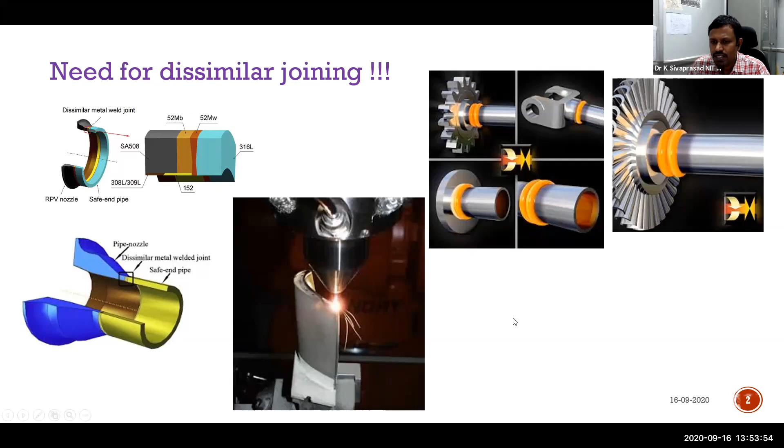So it's not just doing joining alone. The joint efficiency, joint strength, joint metallurgical properties, grain structure, phase structures - all these things one has to be very, very cautious about. So one such attempt is made by my student, Mr. Soklingam. He himself made this workflow.

So I suggested them, you have to take 2 welding processes and at least 1 or 2 additive manufacturing. We could not find 2 varieties of additive manufacturing, but we got a chance to work with selective laser melting, which is a powder bed fusion technique. Then we have readily available with us GTA welding in our lab, and we have good contacts with eminent people working in laser beam welding and electron beam welding in different sectors. So we took their help to get it done.

So he has taken aluminum 0.5 cobalt chromium iron nickel high entropy alloy, then aluminum 0.1 cobalt chromium iron nickel HEA. The difference is in the aluminum content only - here aluminum is half of the fraction, here it is only 10% of the total fraction. First of all, HEA is nothing but high configuration entropy alloy.

To explain in a layman condition, we will say aluminum copper alloy, say aluminum 96%, 4% copper. Then you will say aluminum based.

So this is some other forging operations.

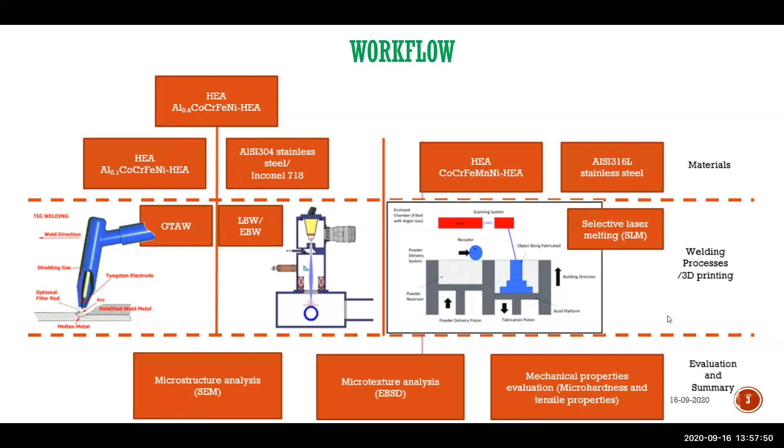So aluminum 0.1 is a single phase FCC, similar to austenitic stainless steel or Inconel 718 equivalent. Aluminum 0.5 has some amount of BCC and some FCC fraction.

Initially we studied a similar system. We felt weldability is there, but it is somewhat difficult, especially for dissimilar welding systems. Then we moved to aluminum 0.1, which is single phase FCC, relatively highly ductile, with much higher work hardening ability than 304 and Inconel 718. We chose this combination because all are FCC, FCC, FCC.

It is supposed to be weldable according to mechanical engineering concepts, but according to metallurgical concepts, there is a huge alloying system. When welding, they melt down and diffuse inside, and there is a high probability that they will form undesirable and brittle phases. So there is a huge problem associated with joining 304 and Inconel 718.

Even though the system is now somewhat stabilized with respect to weldability, there is still some Laves phase and other metallurgical undesirable phase formation, thereby reducing properties. So we chose these three systems for that reason, using popular GTAW, that is TIG welding, and laser and electron beam welding combinations.

The same system we could not do in SLM in Europe because they are restricting aluminum in their system. So without aluminum, we substituted with manganese and started working on this one.

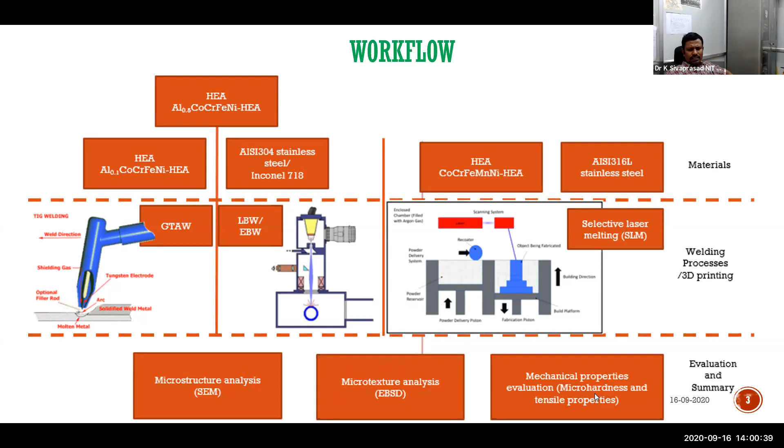He has done extensive microstructural evaluation, followed by microtexture analysis, because I am basically a metallurgist, so I always want to know what is inside the microstructure, what is inside the grain, what are the precipitates. This kind of interest is there for me, so we went for detailed characterization associated with that. Then regular micro hardness profile, tensile properties, and other correlation techniques for required questions.

Then we took that dissimilar welding. We did EBW with respect to 0.1 with 304 stainless steel and 0.1 with Inconel 718 using electron beam welding, which is designated as E.

0.1 stands for AC1, 0.5 stands for AP5, like that it is designated AC2. Then TW stands for TIG welding, LW stands for laser welding.

Then AC2 is the TIG welding combination. T stands for TIG here, with 304 stainless steel and Inconel 718. Inconel 718 we prepared in a particular method where welding will be started, such as solutionizing treatment.

Prior to that, regarding how we prepared the high entropy alloy, we prepared it ourselves, we did not procure it. We took high purity systems - aluminum, cobalt, chromium, iron, nickel - pellets or chips, metal pieces were taken, everywhere minimum 99.95% purity.

All these things were vacuum arc melted.

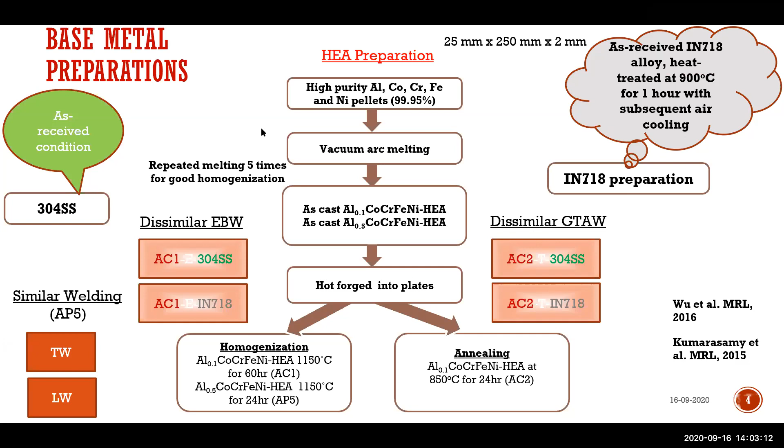We took these elemental systems for arc melting; normally powders we cannot use. So metal chips or machined chips, small cut pieces, whichever form is available, were taken. Then all these things were done by vacuum arc melting.

It is nothing but melting done in vacuum, relatively high vacuum. Then we got a pellet, a small to big size button kind of thing, like a pant button. That much only you can get in a conventional laboratory scale vacuum arc melting.

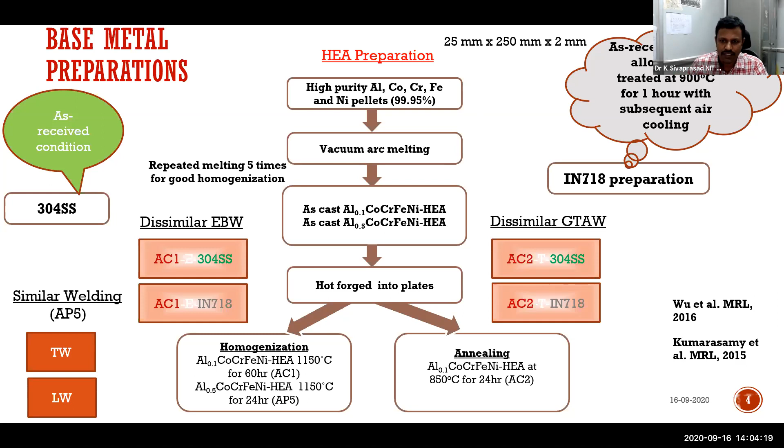He used to make some 3-4 buttons and remelt them, and then go to do blacksmithing - my student. Blacksmithing in a crude way we cannot do, so we had to add a scientific touch. He used to do the blacksmithing with an argon cylinder there, purging the surrounding, because otherwise some elements have a tendency to get oxidized, such as chromium, iron, even aluminum. We don't want elements to oxidize during hot forging, so he did that. Somehow he was able to make small strips, about 2 to 3 fingers in width size.

Then it is rolled down to equivalent to 2 millimeters thickness. Full annealing was done, followed by homogenization and full annealing again, and this process was repeated one more time. Finally, when we examined the microstructure, it showed an equiaxed grain structure, and XRD confirmed a single phase.

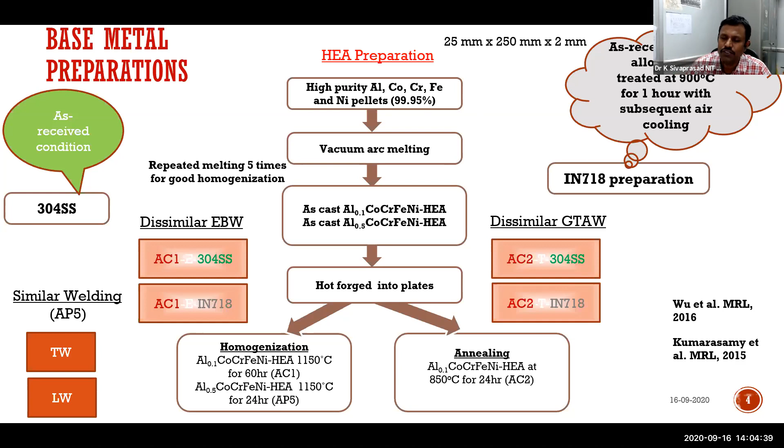Regarding the joint configuration at this stage, I want to explain that this is a dissimilar joint, with an A side and a B side, and the joint is at the center.

All samples were extracted in the transverse direction. As I mentioned, our HEA used to be about 2 fingers in size width, and when making a joint like this, the total width in this direction used to be less. We would get a total width of only about 40 to 45 maximum after the joint.

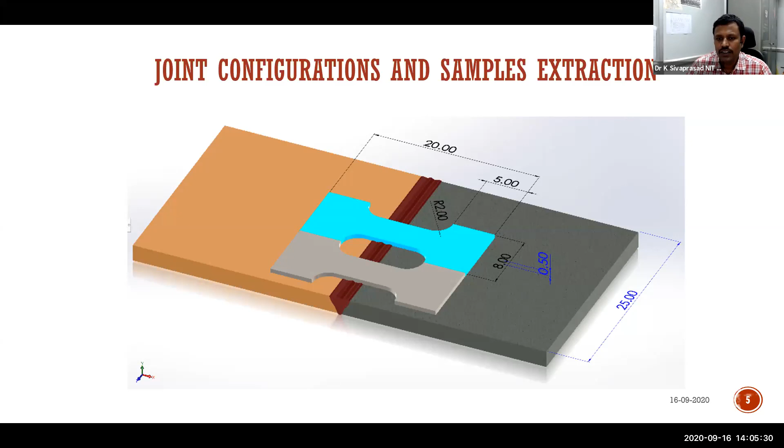So we went for a miniature tensile specimen. Our tensile specimen dimension itself has a total length of 2 centimeters. You can see the dimensions here, which we extracted. We made separate fixtures and jigs for that, and did extensive work to enable our geometries to suit these requirements.

Then first we started with similar welding using aluminum 0.5; gas tungsten arc welding and laser beam welding were performed. Gas tungsten arc welding clearly showed a typical arc welding geometry, a fusion welding structure.

If you take austenitic stainless steel, nickel based alloys, or even this high entropy alloy, all appear to have a similar cellular kind of dendritic structure in the fusion zone—partly cellular, partly dendritic, was observed.

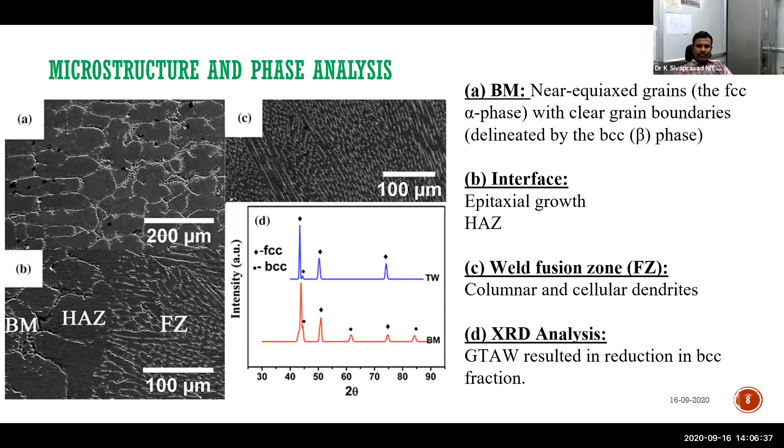When we examined the base metal and TIG weld, some traces of a BCC phase were present in the base metal, since aluminum 0.5 has a significant BCC phase. But when we did TIG welding, similar welding, we were surprised to note that in the fusion zone the BCC phase was dissolved—we got a single phase FCC. In fact, a single FCC phase is advantageous from a mechanical point of view. After seeing this in the XRD, we felt our weld would give good properties.

Being a metallurgist, I wanted to see even the elemental level, how elements were distributed, since I had taken so many elements to make high entropy alloys at the joint, to understand the geometry. We can clearly see there are some aluminum-rich systems and the remaining elements concentrated at other locations. Grain boundaries become relatively rich in aluminum, and in most cases this boundary tends to be the BCC phase—that's what we studied and observed.

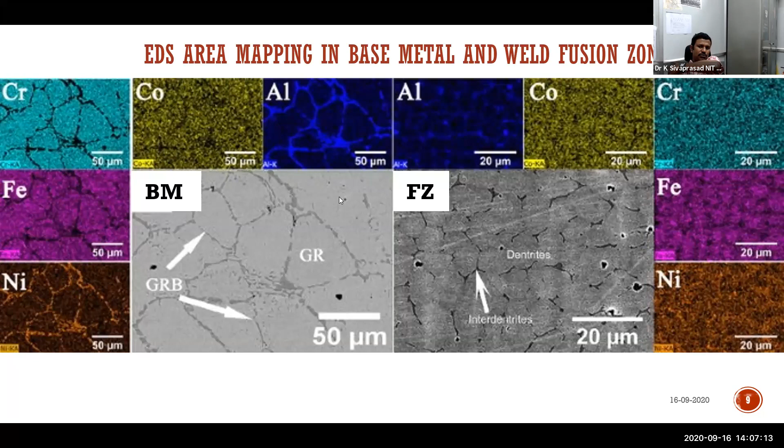When we tested this, to our surprise—normally a fusion zone is supposed to give only about 50% efficiency, that's what we expected—but we got 85% efficiency because the fusion zone was single phase FCC. Normally it's very difficult to get a welded joint close to 60% ductility; that is highly abnormal.

The base metal can comfortably give about 70% ductility for these systems, whether high entropy alloy, austenitic stainless steel, or nickel-based superalloys. These are all low stacking fault energy, single phase FCC systems, which are supposed to exhibit very high strength and high ductility combinations. But fusion zones are usually somewhat disruptive in nature; to our surprise, in this system we got 85% joint efficiency, which is uncommon.

So this was published in Metallurgical and Materials Transactions—that was his first paper. There is no huge dip in the fusion zone, almost a gradual variation, and this also helped achieve good ductility while postponing necking. You can see elongation values of the order of 67% in the base metal, while the TIG weld got 56%, which is very, very good in comparison.

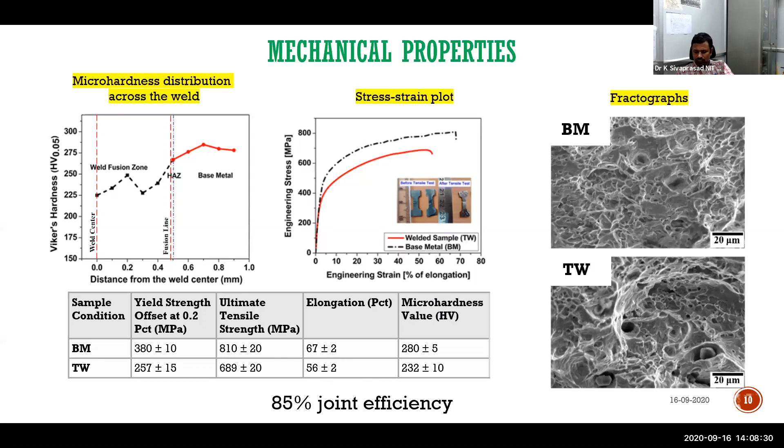As I have explained everything, I have no need to summarize one more time.

Then a similar welding was done using laser beam welding, high entropy laser beam welding, which so far no one has attempted till that period. So we decided we will have it.

This microstructure analysis at different regions of the welded joint, we observed a similar kind of version. Normally TIG welding to laser beam welding, good amount of deviations should be there, but here we got almost similar structure, only relative fineness. Microstructural features are almost same, but it is relatively finer.

Similar to the previous case, the BCC phase was almost completely dissolved in laser welding, which is expected because here melting is faster and cooling rates are also very, very high. So it is expected that the BCC phase could not have evolved.

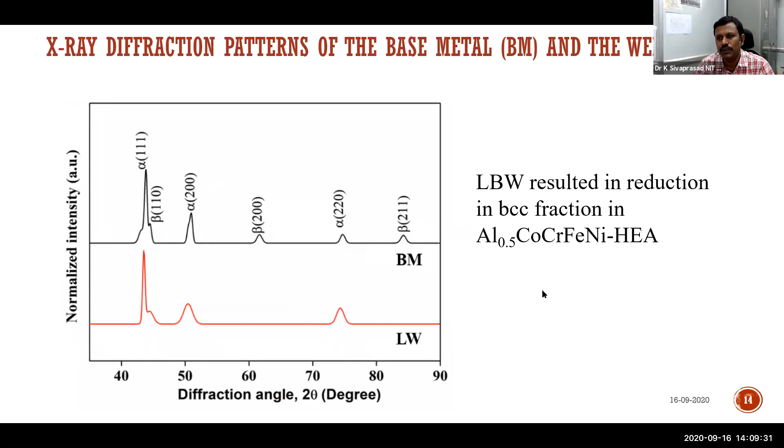Again, similar to that, elemental mapping shows the intensity of individual elements. Here also an aluminum rich system got developed along these grain boundaries. Had it not formed along this BCC phase along grain boundaries, this system could have met even close to 100% efficiency. It is stopped at 85% efficiency in TIG welding, and almost the same with respect to laser beam welding.

In laser welding, the aluminum rich phase at the grain boundary is the culprit. If you are able to avoid forming this aluminum rich phase at the grain boundary, it is expected to give even 100% efficiency of the joint.

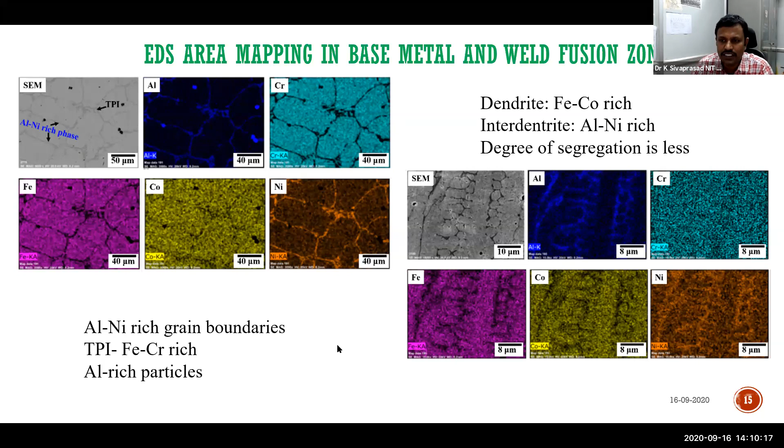Here also almost properties are extremely good, we have seen. Then...

We took this laser welding work to a prestigious ICEM international conference on advanced engineering materials and systems, held in Osaka, Japan, where we projected this, and we got the best paper award for this work because laser welding of high entropy alloy was done for the first time by that period.

One professor from Japan, from Tokyo University, suggested that why don't you go for corrosion studies? That would make much difference.

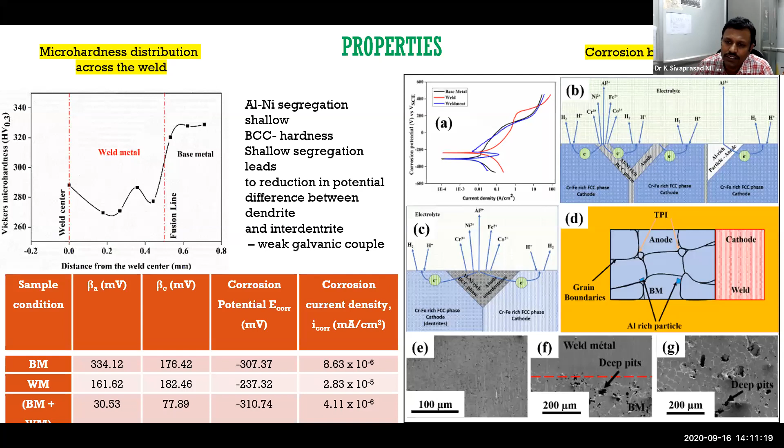So this is just a brief about similar welding of the 0.5 aluminum 0.5 high entropy alloy system. In both cases, 85% and above weld joint efficiency was observed, which is really uncommon in conventional systems, and this could have been possible only because of the formation of a single phase FCC structure.

So that is the reason I strongly believe that those who are working in welding should fairly develop their metallurgy skills, so that will help in interpreting your results in a more accurate and precise way.

Coming to dissimilar welding, thereafter I want to show you some color images. This color image, as you know by seeing itself, you can say it's a microstructure, but this image was taken based on orientation relationship. It is an attachment to any SEM, scanning electron microscope. This technique is called orientation imaging microscopy.

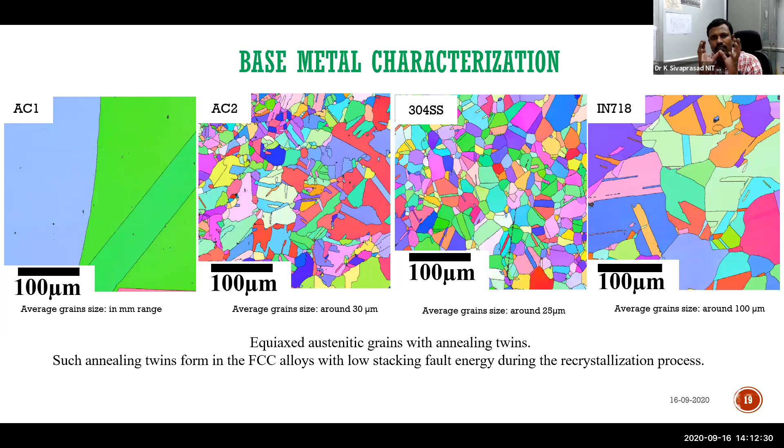That attachment name is EBSD, electron backscatter diffraction technique. So each and every color is nothing but the particular grain orientation, how the crystal is oriented, how the crystal has grown. That's what the color coding represents.

In this case, what we have taken, for example, either AC1 alloy or AC2 alloy, or 304 stainless steel, or Inconel 718. In AC1 alloy, you can see huge massive grain boundaries and parallel lines, which is a twin structure, whereas there's a relatively fine grain structure in AC2, and again parallel lines in this one.

The parallel lines associated with systems like this and like this are all called twins. Twinning is very common in this low stacking fault energy material. All three systems we have chosen are low stacking fault energy systems. That is another reason we have chosen these three systems.

AC2 high entropy alloy, 304 stainless steel, and Inconel 718 - in all these cases you can see the twinning band. The only thing is, because of the conventional treatments that were given, which are suggested in the literature to give before any welding, we followed that, and we followed this welding process.

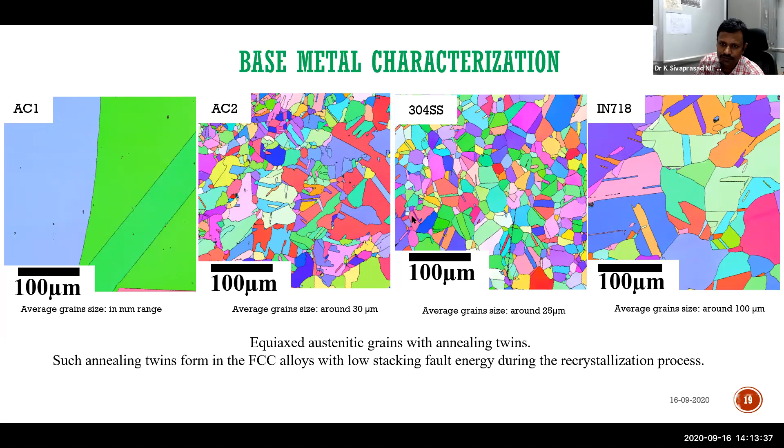TIG welding and MIG welding have been used by others for dissimilar systems. We felt, why can't we take this same system for our dissimilar joining with high entropy alloy? So we have taken GTA with these parameters, and a high energy density welding process such as electron beam welding.

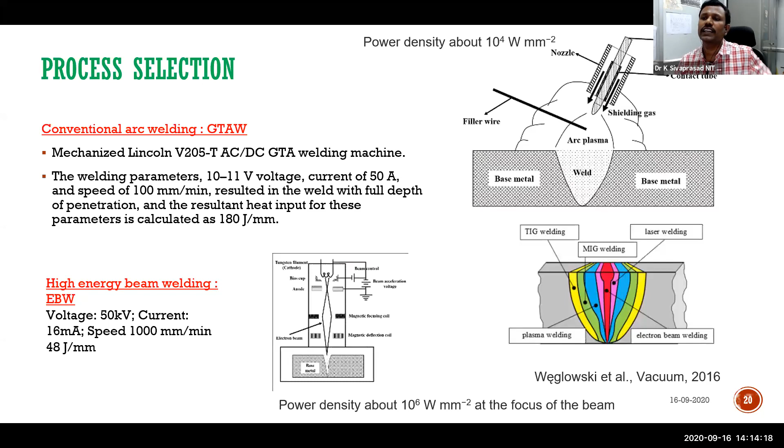So we have taken AC2 to 304 stainless steel and AC1 to 304 stainless steel. One is tungsten, the other is electron beam. The wine glass shaped fusion joint structure is for electron beam welding.

This is AC2 to 304 stainless steel with the same thickness. Please understand the thicknesses are same. We have seen a very wide 3.8 millimeter fusion joint in TIG welding, whereas 1.96 millimeters wide fusion joint in the case of electron beam weld.

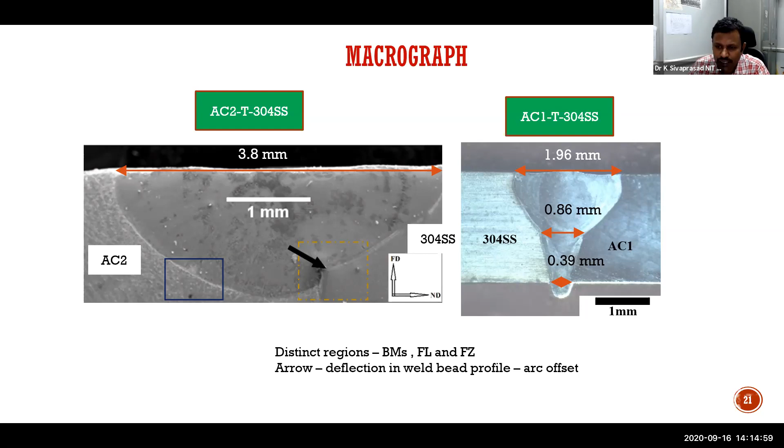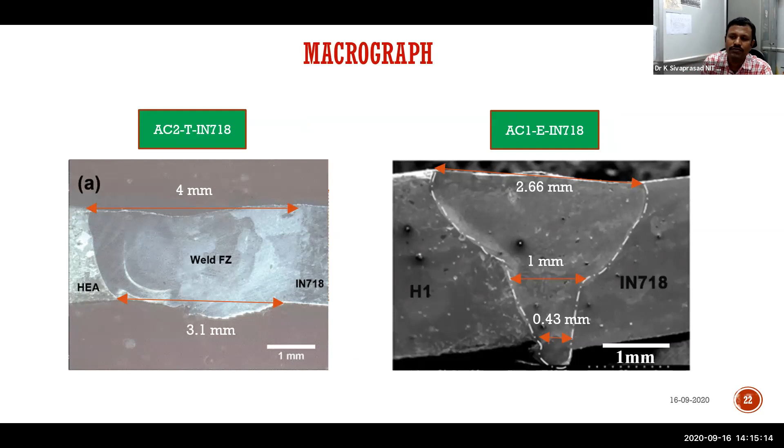When we have done the same thing with Inconel 718, it was slightly larger because the system demanded more fusion penetration, so we slightly increased the current, and thereby it is slightly increased.

When we started characterizing that, on the steel side we observed martensite. The martensite formation close to the fusion zone is normally very common in these systems. That's called recrystallized or resolidified martensite, due to faster cooling rates associated with the system.

The cellular structure, which is observed in similar welding systems, was also observed here. This again evidences that we are supposed to get decent properties.

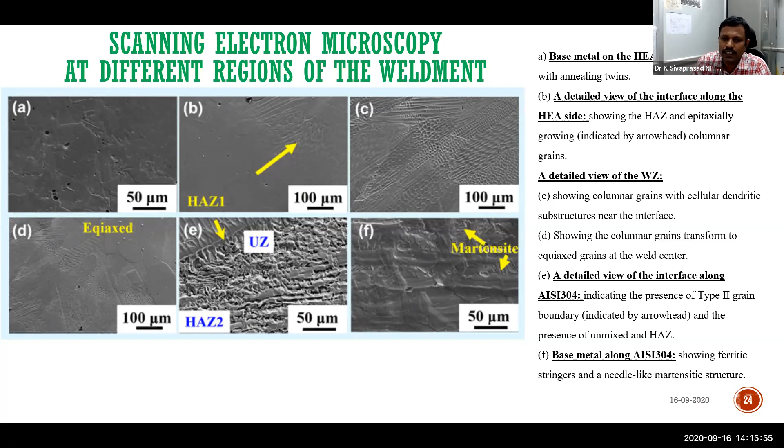At the fusion zone we also decided to go for textured or orientation based microstructure analysis, and to our surprise we saw type 2 boundary systems evolving here. Type 2 systems normally evolve with a butter layer, whereas in this case, due to the extreme wide variation in chemistry associated with the system, type 2 boundaries started evolving.

On the HEA side we saw an epitaxial kind of growth, almost matching boundary sizes and orientation matching from both the HAZ side and the fusion zone side. That's called epitaxially grown crystals. At almost the same magnification, on the left side you can see very fine dendritic structure.

Whereas on the right side, the steel side, we saw a very coarse dendritic structure. The coarse dendritic structure is very common wherever type 2 boundaries form.

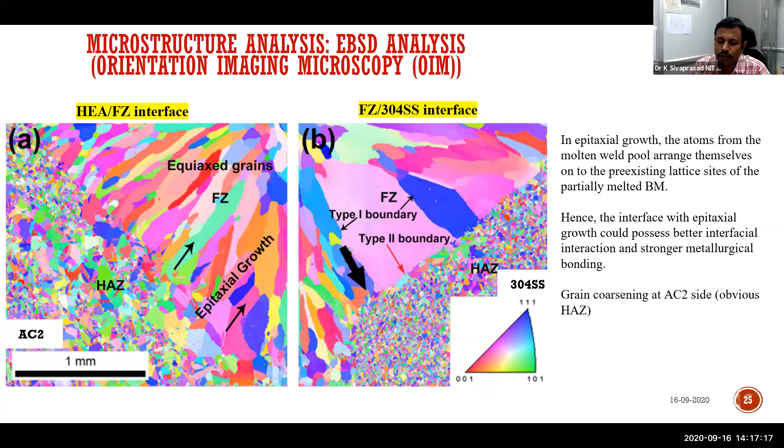Type 2 boundaries, in some systems, are essential so as to grow wider dendrites, so that the system will have a softer structure, so it will not be brittle or embrittled or hardened for that purpose.

There is a typical growth structure, and how it forms is explained, normally very clearly in casting. Here also it is nothing but a localized casting, so you can see decently similar microstructures to that of a cast material.

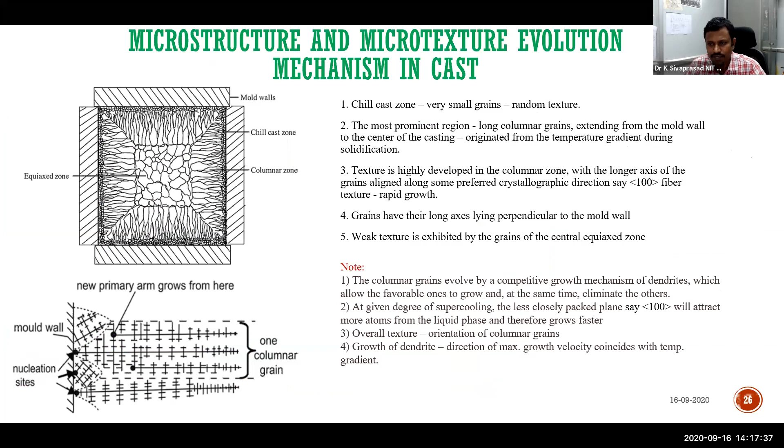This is a schematic associated with what we got on the dissimilar side. On the steel side, we got type 2 boundaries similar to this, thereby coarser dendrites are formed.

On the left side it is like an epitaxially grown structure, with matching grain size and matching dendrite size observed in the epitaxially grown structures. So this clearly evidences why this differentiation is observed.

But to our surprise, this actually favored us. Otherwise, if it had been a similar kind of structure, the gradual property variation from one side to the other could not have happened. There would be an abrupt property variation from one end to the other if you go through a hardness survey, which is very common in dissimilar welding.

But we did not see that kind of thing in this system, because of the type 2 boundary formation on the steel side.

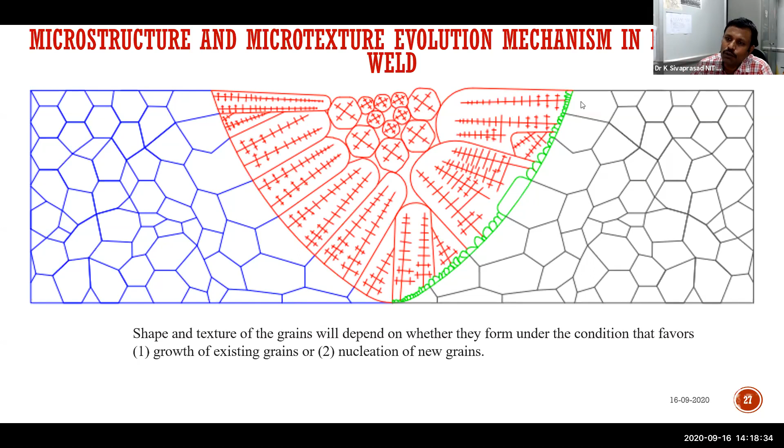Then again, I told you I'm a metallurgist. I'm very keen on seeing whether any undesirable phases are going to form or not, so this was evaluated through calculation of phase diagram software.

It's an atomistic simulation software and phase diagram software. We confirmed that there are no undesirable phases forming, and a single phase FCC structure only is stabilized even in fusion welding. So we can see the major axis and minor axis deviations, how much at the bottom portion, how much at the top portion, we have given all details associated with that.

This clearly explains that there are no abrupt change values, only a gradual variation. Similarly, we have done elemental analysis, and here also you can see that all the elements do not abruptly change, only a gradual change is there.

In the fusion zone, on both sides, the HEA side as well as the stainless steel side, a good amount of nickel is there. This good amount of nickel favored the structural integrity associated with this joint.

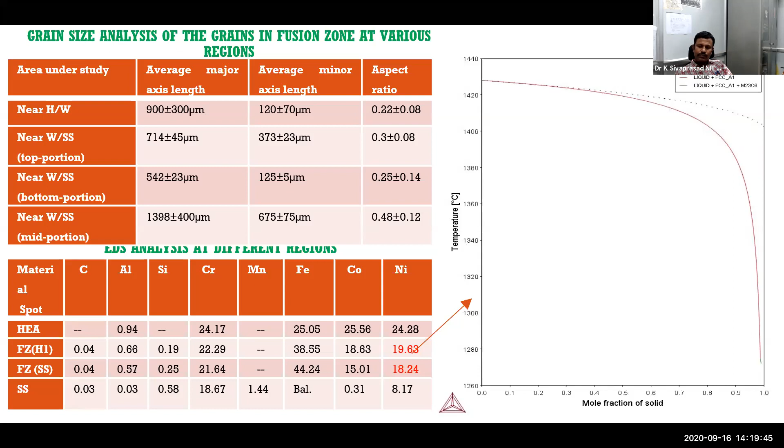The line map shows that near the fusion zone, except at one location, it is almost a gradual variation, very decent and gradual, which we have observed. This also evidences that as there is no major chemistry variation from region 1 to region 2, there will not be any metallurgical stress concentration in these systems.

So we are expecting uniform deformation, good strength and ductility combinations from the fusion zone, and at least a decent weld efficiency. Not like conventional weld systems, where even similar welding of aluminum alloys gives 50 to 70% weld efficiency, whereas dissimilar systems most of the time give less than 50% weld efficiency.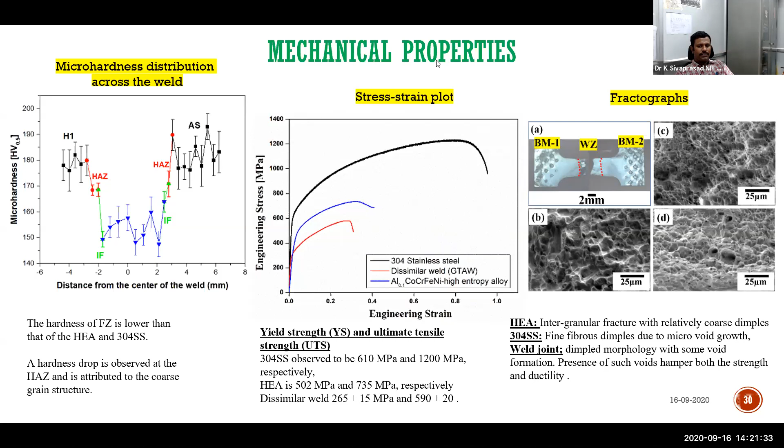Again, we wanted to see the associated interference with this system. We calculated using the Schaeffler diagram and pseudo-binary diagram, taking chromium equivalent, and found that our system is falling with austenitic structure only. This is the location where my Al0.1 HEA is falling, and even the weld metal at top and bottom is falling well within single phase FCC structure.

Single phase FCC. Whereas in the unmixed zone, one line formed very close to the fusion zone, and there a small amount of BCC phase possibility was observed. Even our 304 stainless steel, whatever we took, is not in a fully annealed condition, so a small fraction of BCC was also observed there. That is what the Schaeffler diagram, superimposed with chromium equivalent, clearly indicates.

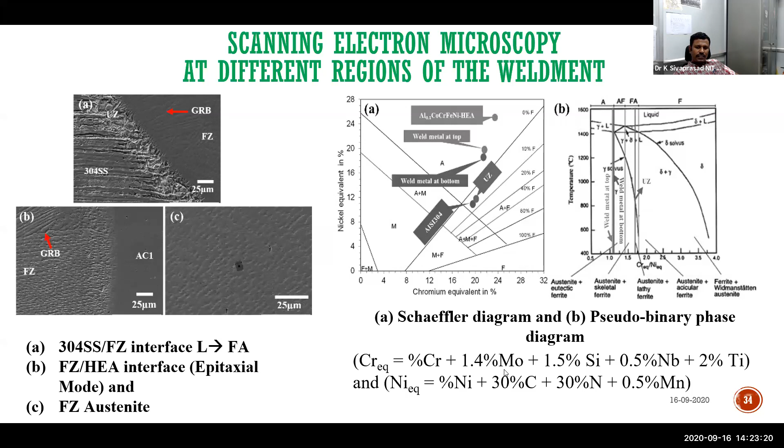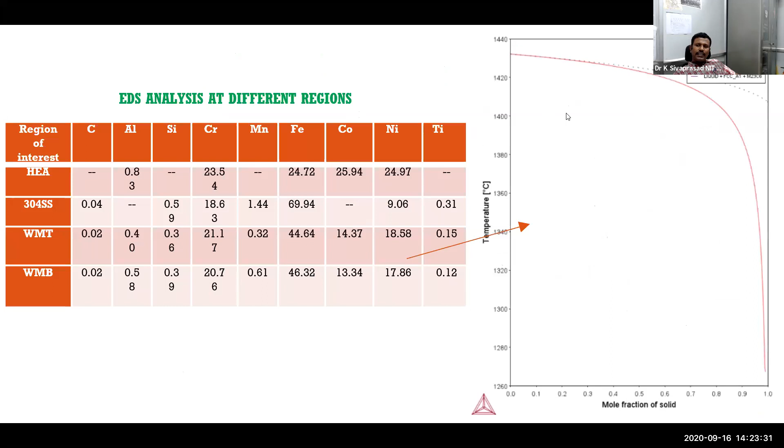Again here, we have done calculation of phase diagrams, and confirmed that similar to TIG welding, here also it is forming only a single phase FCC structure.

Here, we were surprised to see that the dissimilar weld (DW) started exhibiting higher strength than the H1, which is uncommon. The DW's performance is exclusively because of the formation of single phase structure and a relatively coarse, epitaxially grown structure on the HEA side. All these combinations helped the material exhibit relatively higher strength.

It could not exhibit higher ductility, but still decent ductility, actually very high, around 50% ductility. It could not project 80% or 90% ductility because, as I told you, an unmixed zone formed at the fusion boundary.

That unmixed zone, where a small amount of BCC formed, is exactly where it failed. So the failure is because of that undesirable phase formed. Had that unmixed zone not formed the undesirable BCC phase, and instead formed single phase FCC there too, we probably could have gotten our curve to a still higher side, like this.

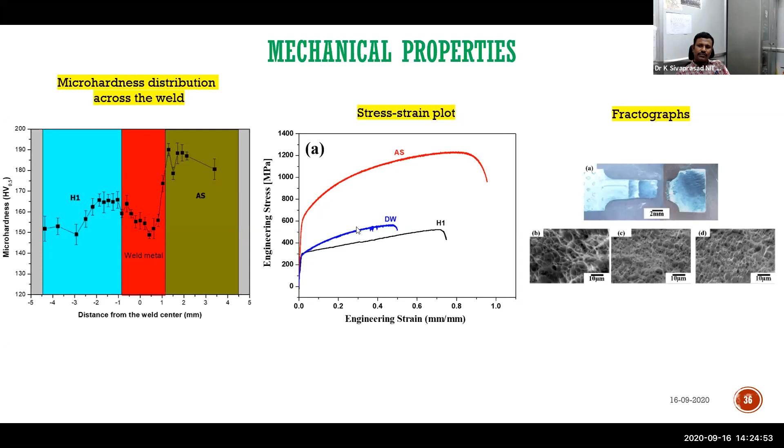Okay, and this, with respect to steel and high entropy alloy, we have seen.

Now, Inconel 718 and high entropy alloy. This is another complex system. Inconel 718 is a very complex metallurgy system. It's a typically well-engineered alloy system, people used to call all nickel based superalloys, and Inconel 718 is one such good alloy among them. It has so many elements, almost 12 to 16 elements will be there in a given Inconel 718, but nickel will be very high, 52%. That is the reason it is called a nickel based superalloy.

High entropy alloy is not like that, still it is very good. Why do we want to take Inconel 718 on one side and high austenitic stainless steel on the other side to weld along with HEA? On one side, austenitic stainless steel has less nickel, 18% chromium, only 8% nickel. Compared to that, 20% nickel in high entropy alloy. And on the other system we have taken Inconel 718 where nickel will be 52%, whereas high entropy alloy is 20%. So to see these transitional joint variations, we have chosen these systems.

We have seen again that unmixed zone here, where again no doubt a good amount of BCC has formed. Otherwise, it is similar to the microstructural features which we conventionally get from typical Inconel 718 weld fusion zones, such as formation of small laves phase and NbC interdendritic region precipitates, and gray platelets, carbides, NbC carbides, laves phase. These are all very common in fusion zones of Inconel 718.

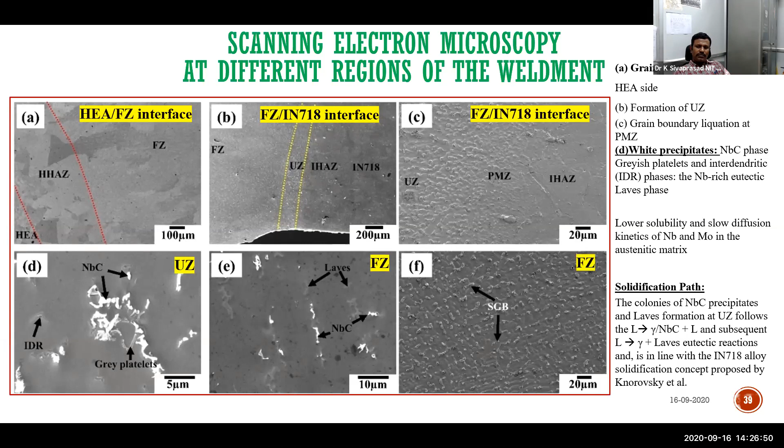Normally, Inconel 718 weld efficiency used to be something like 60% or so only, but here we could get relatively superior results compared to that.

Again, here also orientation imaging microscopy was done. This unmixed zone, one can clearly see this. Then here HAZ was clearly seen, and almost all grains were growing in the 001 direction. This is epitaxial grown direction. That is evidence. So again, orientation imaging microscopy, we have analyzed so many things metallurgically.

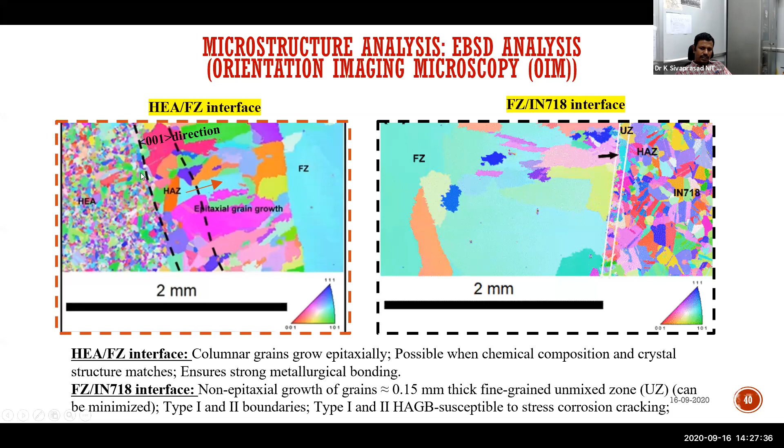I don't want to bore you with all the metallurgical aspects related to it. With this kind of gradual transition, it is supposed to give good properties in these microstructures. High angle boundaries and low angle boundaries, everything you can calculate.

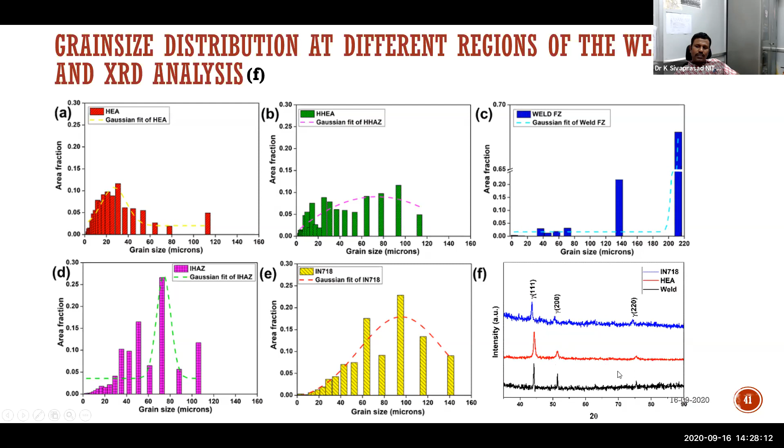Associated with this, on the high entropy side, HA weld fusion zone, see that grain size observed is almost 140 microns in the weld fusion zone. Because of the epitaxial growth associated with that, long aspect ratio and very wide dendrites were developed, so the grain size associated with that appears to be very high. And here also, similar to the earlier systems, we did not find any BCC phase, only single phase FCC system.

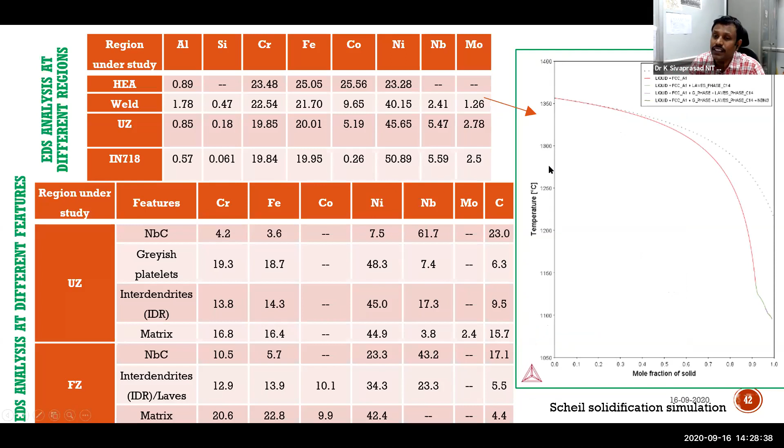Again, calculation approach, because we have to confirm that there are no other undesirable carbides forming. Yes, here also M23C6 kind of carbides are not forming, but here the curve is slightly closer with some minor carbides. So if you are not standardizing the welding process, you may end up with undesirable carbides. So it's a cautious thing that we have to keep in mind.

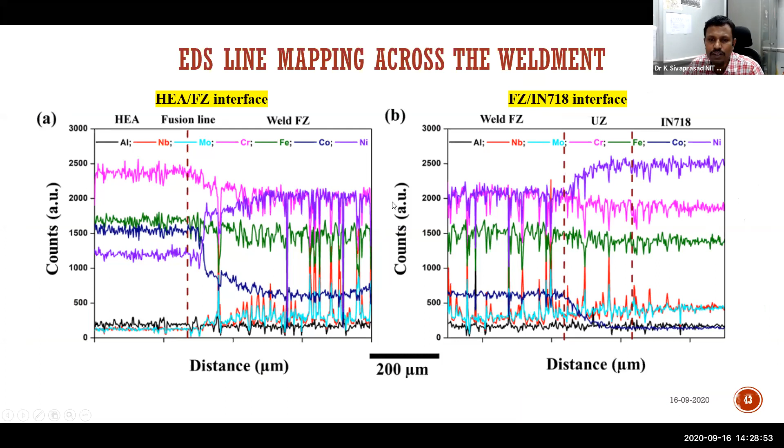And here also elemental distribution is uniform. The many dips, many fluctuations here and there at particular intervals are associated with laves phase formation in the weld fusion zone, and Inconel 718 especially. Again, here also we have seen that this dissimilar weld joint is comparable to that of HEA, definitely.

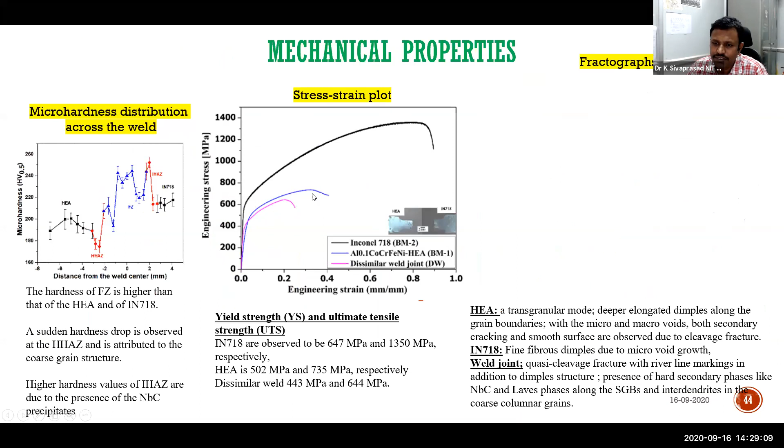Then electron beam welding of high entropy alloy with Inconel 718. Earlier the combination was also high entropy alloy with Inconel 718, but that was GTA welding, and this is electron beam welding.

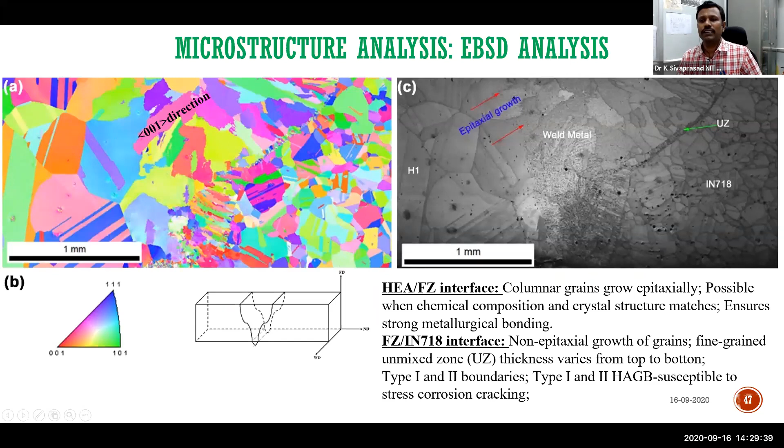Orientation imaging microscopy here also, on the HEA side it is showing 001 planar direction columnar growth, that is epitaxial growth. Very clearly it is observed and demonstrated. But the fusion zone was very fine compared to GTA welding. The cellular structure size used to be very fine. And these finer structures, we know, are always expected to give better properties.

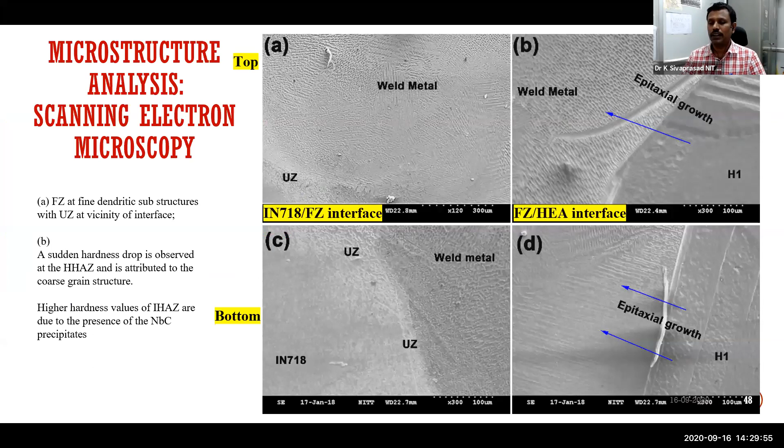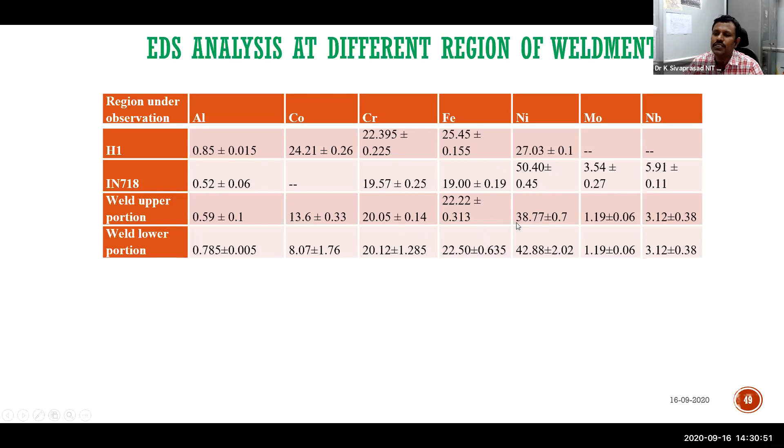Chromium is comparable value because chromium on that side also will be there, this side also is there. Similarly, iron and nickel. In fact, in the fusion zone it is higher because Inconel 718 is also contributing a good amount of nickel. It's nickel based, with higher nickel compared to the high entropy alloy, so this will favor the formation of single phase FCC structure compared to other things.

Except these Laves phases, analysis associated with that one, especially in the unmixed zone, the fineness is very disrupting in nature. If you are able to avoid this unmixed zone, probably you can avoid Laves phase. But in some cases, the overall summary is if you are able to eliminate Laves phase in Inconel or Inconel related fusion zones, you will get superior properties. That's what we have seen here.

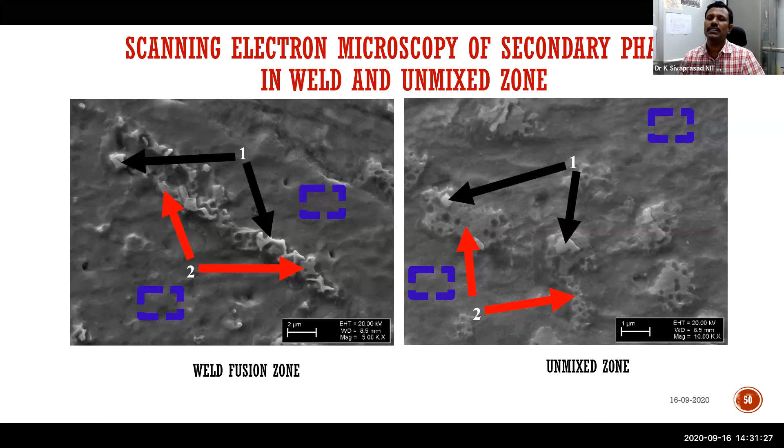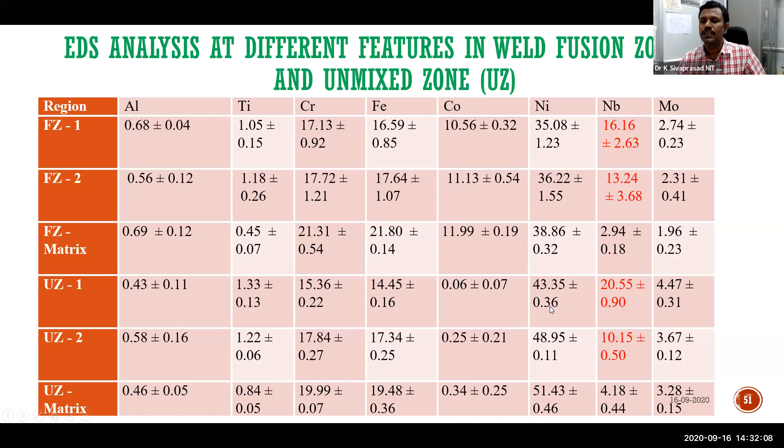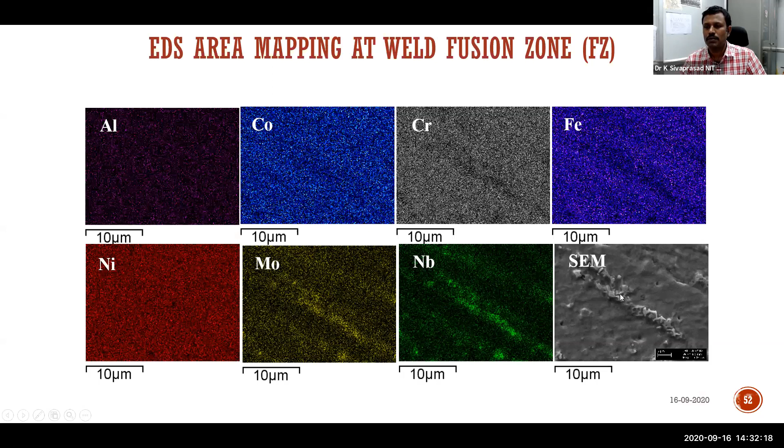Then EDS analysis with different features in a weld fusion zone. Here, niobium concentration was observed in fusion zone 1, fusion zone 2, and unmixed zone 1 and unmixed zone 2. So in both cases, fusion zone and unmixed zone side locations, the niobium is becoming rich. Niobium rich is advantageous, but unfortunately small amount of carbon which has arisen from the Inconel 718 started forming niobium carbides. Discrete niobium carbides are favorable, continuous niobium carbides, a network of continuously found niobium carbides, are detrimental. So we have seen that niobium is distributed like in a line, but it is discrete. You can see the patch through this SEM image. That is the reason the property we got is higher strength.

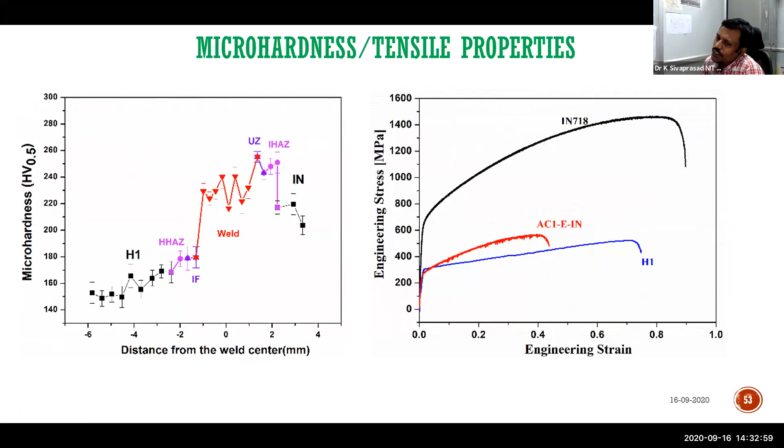But as I said, niobium carbide and Laves phase formation in the network reduce fusion zone ductility. Strength is relatively high because of hard phase formation, but ductility is reduced because of that, because wherever hard and strong phase combinations will be there, if the interface is weaker, void will suddenly form. The moment void forms, it has touched UTS, then afterwards it is dip only. If you postpone that, probably the curve will go up like this. So if you are able to postpone your necking conditions or void formation situations in the microstructure, you can get high strength and ductility combinations. That's what it is proved.

Next, welding was done. Welding proved that around 80% efficiency was observed. But the same thing we want to do through selective laser melting, additive manufacturing.

So in this also, we don't just want to do high entropy alloy separately and nickel-based superalloy separately, and then weld it. No. We want to build the layer itself as a bimetal. Such as, first I will build a particular thickness of, say, Inconel, then I will stop, drain the powder, and fill with high entropy alloy powder, then start melting with another thickness. Say 4 mm total, if I am building 2 mm for high entropy alloy and 2 mm for Inconel, or 2 mm for high entropy alloy and 2 mm for stainless steel. Like that, I started building. That is the novelty associated with this additive manufacturing concept we have considered.

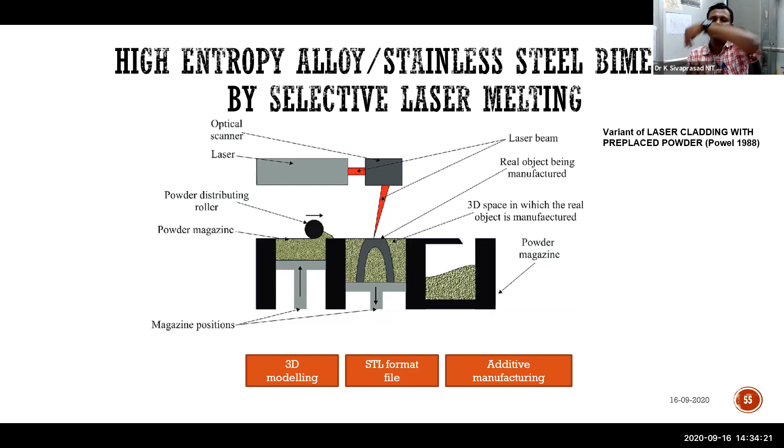And what is selective laser melting? If you want to just see, here the bottom magazine will be there, which is the movement associated with the bed. Powder will be there in the tank. The magazine portion will be smaller, so when one layer is done, the magazine will come down, then the roller will come and fill the powders. Then on that, the laser will move. Then again the magazine will move a particular distance down, then again a cavity kind of thing will form, and the roller will move and fill the powder. Then again the laser will melt.

So based on laser movement, which is controlled by an AutoCAD diagram, the coordinates of the laser movement can be controlled very efficiently to even less than micron precision. So you will get your final product very accurately. And if you are able to optimize your melting rate, melting overlap, nugget and other things, you can significantly reduce your porosity also.

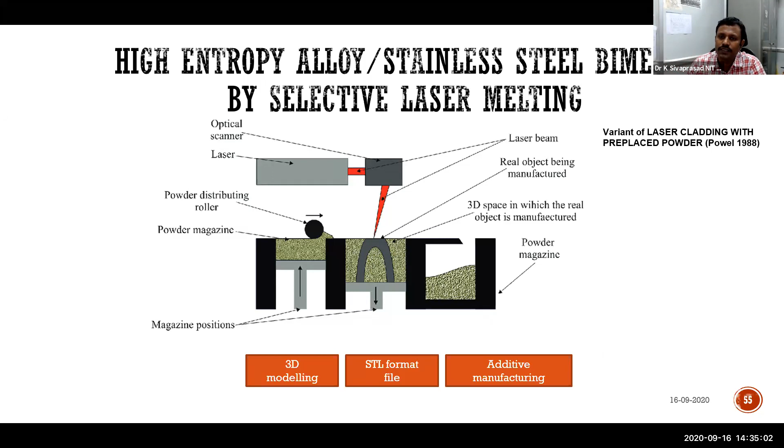Normally for those who are working in additive manufacturing, they are very well versed in that one. You are supposed to use atomized powders only, so that the powder flow and other things will be very comfortable.

There is a monopoly in SLM or EB melting kind of equipment. The supplier of the unit will say you have to use my powders only, you should not use other powders. This is another reason why high entropy alloy additive manufacturing was not done in India so far, whereas in other countries they have stopped listening to the supplier and started doing their own atomized powders, going out of the box.

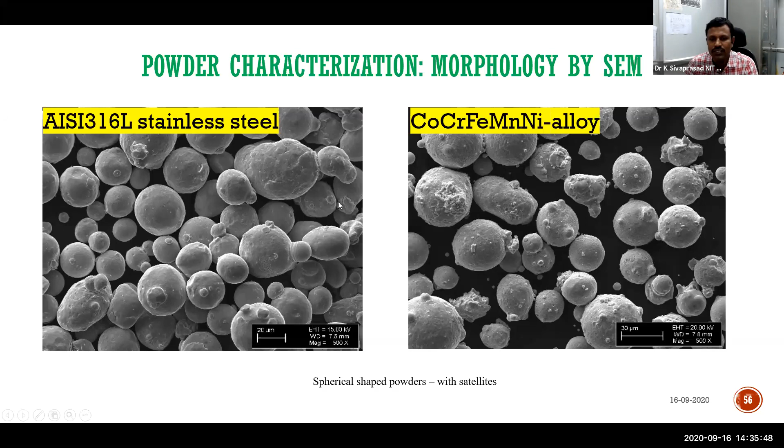So these powders were made in Europe, Estonia, and brought here.

The only requirement in SLM is that your powder particle size distribution should match. If you are taking 2 or 3 systems, it should match so that flow characteristics will be good, and particle packing will be good or comparable from one system to another.

I'm in a meeting, I'll call you later, I'm coming. Sorry for the disturbance.

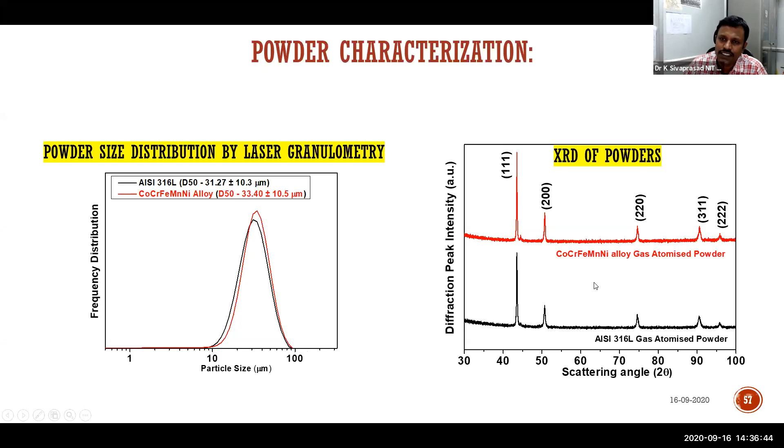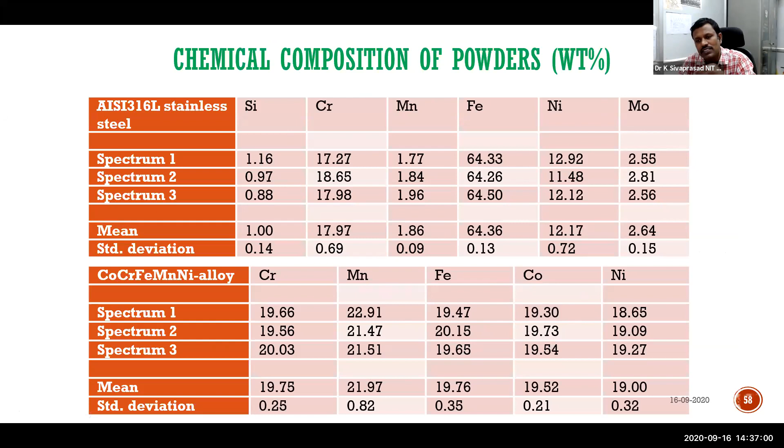So this steel and high entropy alloy powder particle distribution should be the same. The atomized conditions were taken accordingly, and two sets of powders were collected. Powder XRD was done, showing clearly that these powders are single phase FCC. XRD tells you whether it is FCC phase, single phase, or multi phase. Then chemical composition analysis using SEM EDS showed that the chemistry is almost matching across number of locations and number of particles, so the chemistry associated with particles is very good.

Optimization of printing parameters was done. When we took the laser from lower current to higher current and exposure time lower to higher, we could get decent optimization. There is a method to optimize SLM, and we used methods like Taguchi and even ANFIS models for this purpose, which I am not projecting here. So we have identified SLM conditions where you will get very few defects.

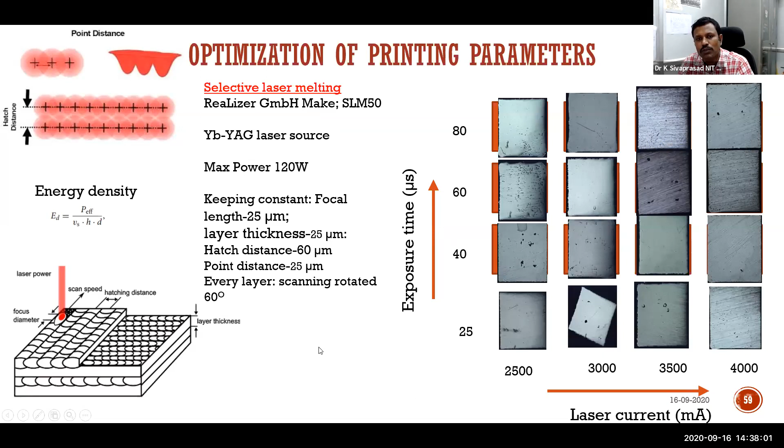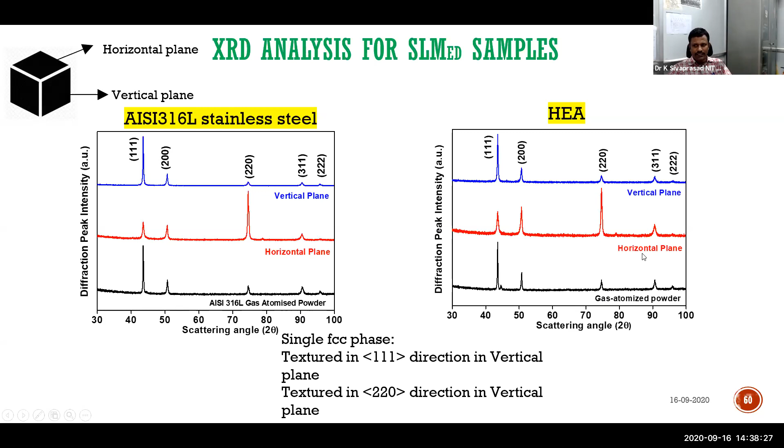Then we studied the vertical plane because the building plane will be like this - horizontal plane and vertical plane. One has to study the vertical and horizontal plane orientation because grain orientation changes from top to bottom side, so vertical plane gives one orientation and horizontal plane gives another. Always the vertical plane matches with that of the other elemental systems or powder systems. Vertical plane peak intensity variations match with the atomized powder, and similarly for the high entropy alloy, the atomized powder and vertical plane match. Horizontal plane texture will vary, because of the texture associated with any additive manufacturing components.

In the microstructures, you can see porosity was reduced to less than 1%, which is challenging to achieve in additive manufacturing, but once it is optimized, it is nothing - you can do it comfortably.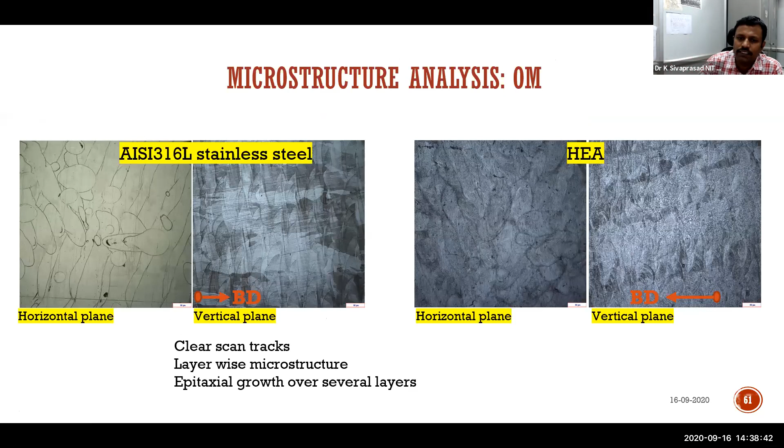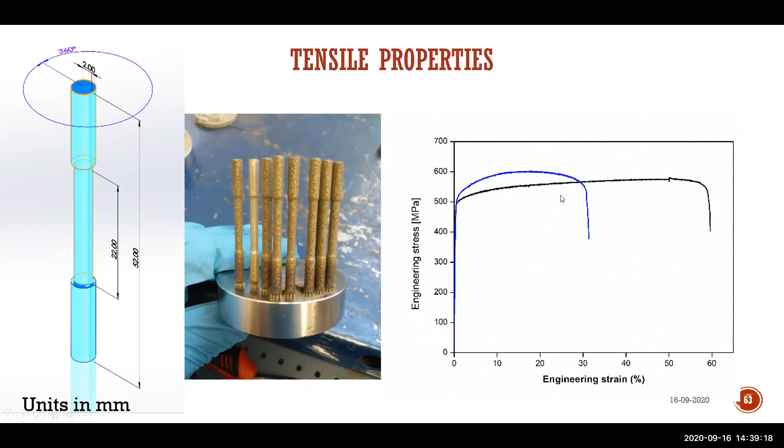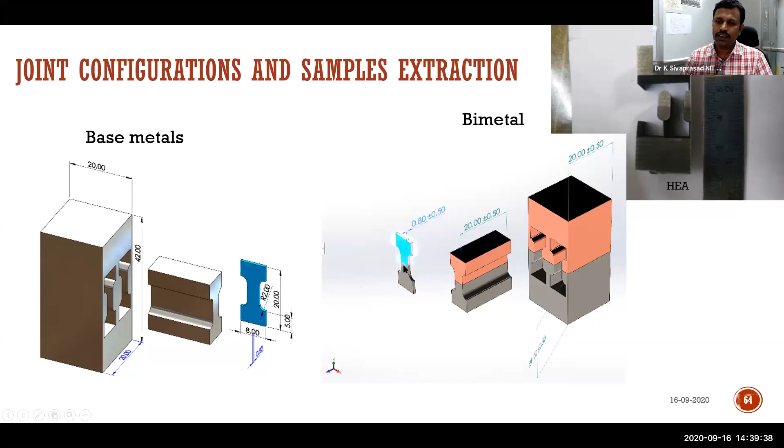So we extracted miniature tensile specimens from this and sliced a number of samples. If it is a base metal it looks like this, if it is a bimetal with two elemental systems it looks like this, and we extracted and tested accordingly.

Microstructure at the interface does not form any undesirable phases or serious precipitates, because when building with powder, once you build 20mm thickness, you have to empty the complete container and fill the other powder. By that time thorough cleaning precautions must be maintained so contamination will not occur. To verify this, the interface was studied, and in fact the interface turns out to be very strong - you can see this, you can feel this, how strong the interface is.

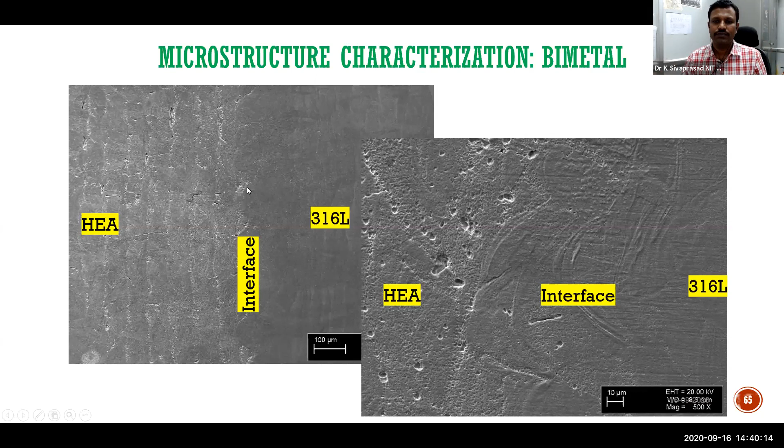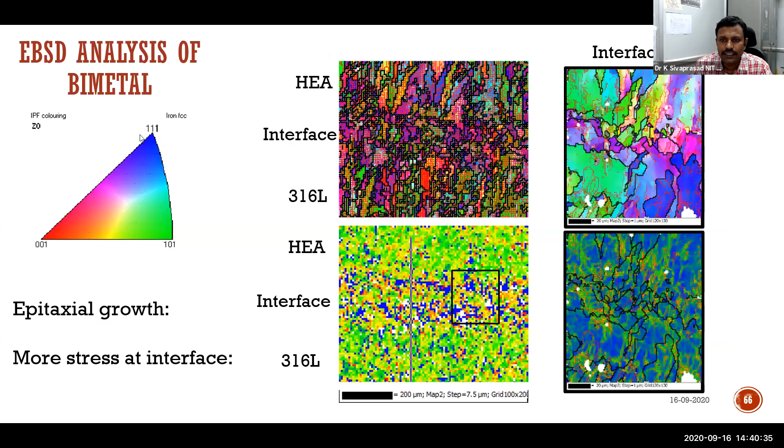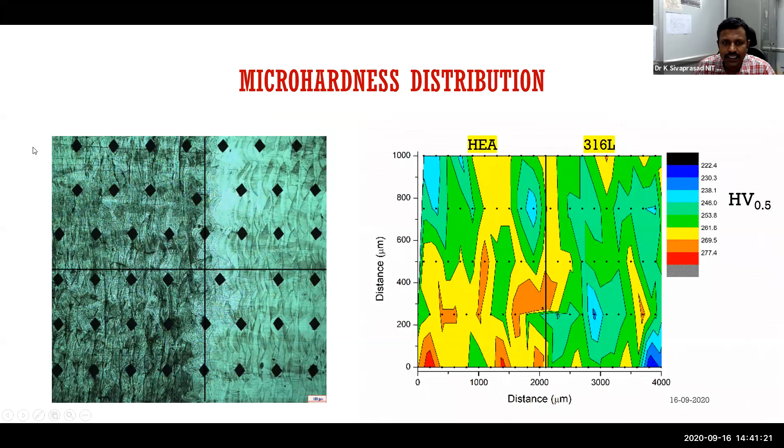Then the hardness profile is taken to see if there are any extremities associated with that. Good deviations are there from 316 to HEA, but it's a gradual variation, yellow rich region gradually changing to green rich region. So there is no abrupt change, which has given us almost the same strength with only ductility variations.

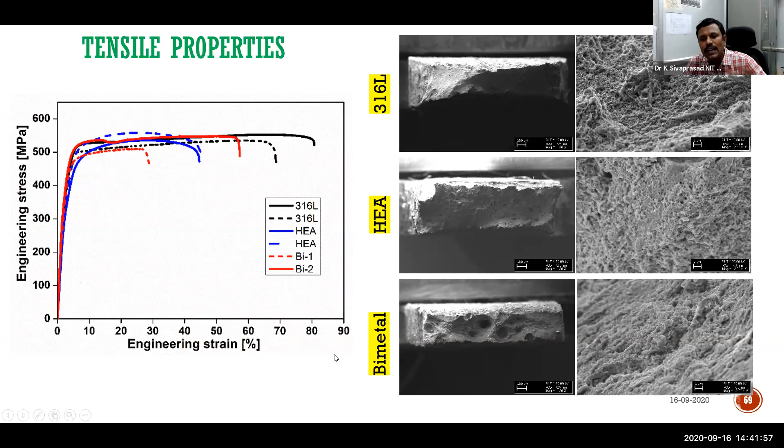We have also seen ductility variations; wherever porosity is present, fracture occurs only in those locations. So if you are able to optimize your additive manufacturing parameters very precisely to bring porosity further down, strength and ductility can be matched with that of even the base metal. So additive manufacturing is a potential tool not only for making alloys, but even for bimetals and multi-layers also. That is the summary of our study.

So with this, I just want to highlight that so far we have only been thinking of additive manufacturing of simple components, whereas we can make bimetals. Afterwards, in a few samples, we have done multi-layers also, alternative layers and multi-layers, which has given wonderful results that I am yet to publish, so I didn't project it here.

In fact, it started giving bulletproof characteristics. So that is the reason I can say additive manufacturing is going to be a potential tool even for structural systems. Earlier, people used to use it only for biological systems or biomedical implant systems and so on, but nowadays it is moving more towards the structural side. Once you start reducing porosity and controlling your microstructure, you will make wonders out of this.

Thank you. Any questions?